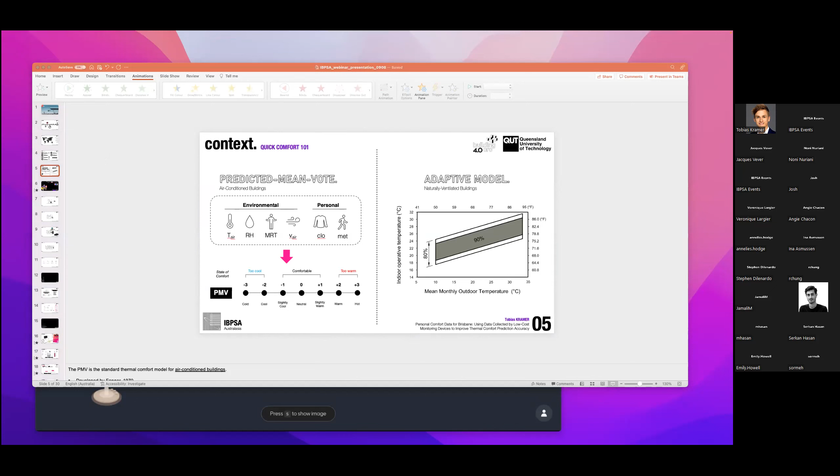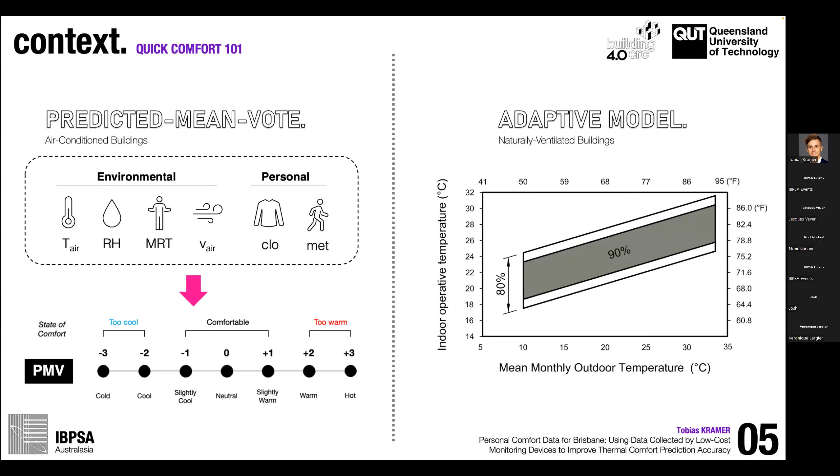Sorry, Toby, sorry to interrupt. I'm just making sure that you are going through your slides, because I can only see the first slide. I think we all can just see the first slide. Okay, that's weird. Let me just do it again. I think it's sharing the wrong screen. Let me just do it again. Yeah, no worries. This one. Sorry about that. Okay, do you see the slide now? Yes. Okay. So I'll just go back then.

So about myself, I think I mentioned everything. So visualization, then the team behind me. So now you can actually see the people that are in the team. So as I said, great people behind me.

And now just a short repetition. So we have the predicted mean vote on the left side and the adaptive model on the right-hand side. And continuing with my explanation about the adaptive model, that's actually a pretty straightforward way, because we only have two input variables, the indoor operative temperature and the mean monthly outdoor temperature, or running mean. And then we relate these two variables to each other. And usually the goal is to get in that comfort band to create indoor climate conditions which are comfortable. So these are the two conventional models.

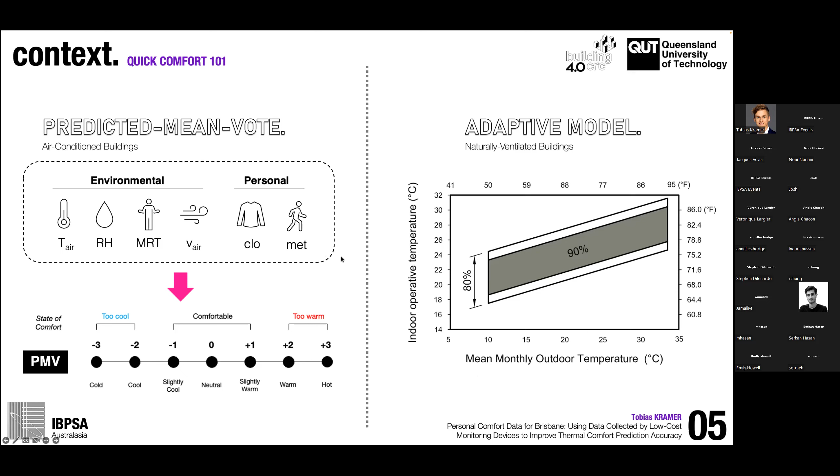And in today's presentation, I will mainly talk about the predicted mean vote model, because the data that we collected is from air-conditioned buildings. But as I said, before I start with the actual presentation, I think that first of all you guys should have your say. So I created a short question on Menti. So you can just scan the QR code here, or just go to menti.com and use this code to access the question. And then feel free to answer the question in whatever way you like, and then we can briefly address your answers before I go on.

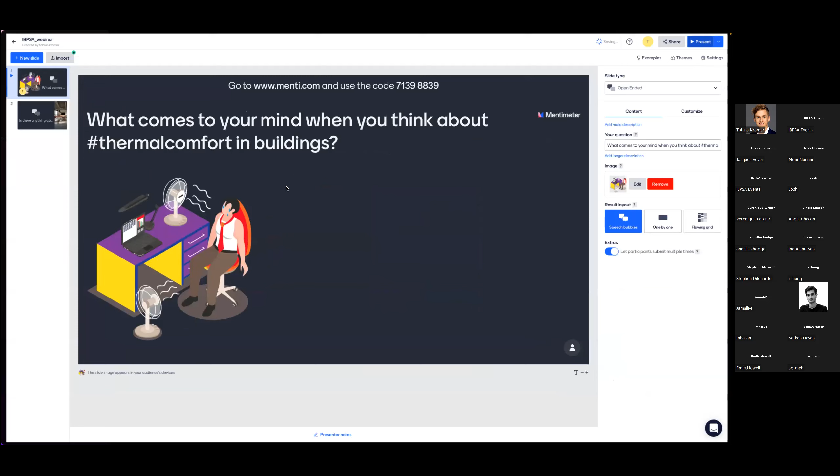So let me just make sure that you guys see the answers. All right. I think if you keep the code and the QR as well next to it, it'll be good. So people can, okay, great. Menti code.

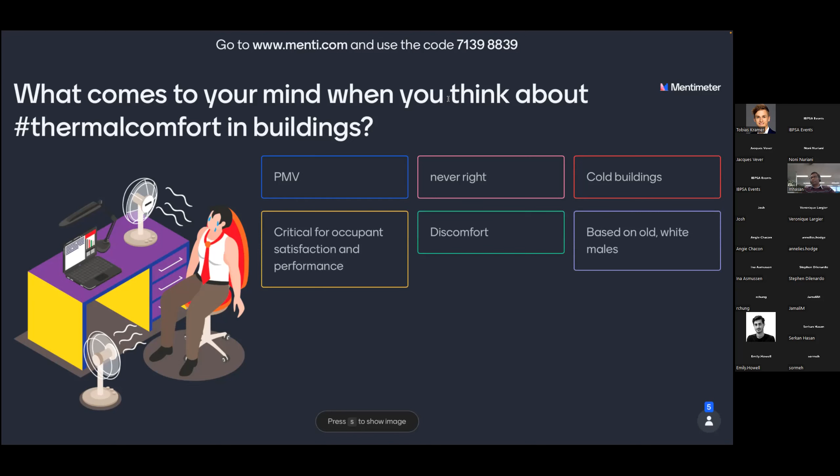Yes, that's interesting. That's basically what I expected. So never right, cold buildings. These are the answers that we get from most consultants. Also, comfort definitely critical for occupant satisfaction. Unfortunately, when we talk about thermal comfort, it's often discomfort that people experience. Chills from sitting under a diffuser. These are the answers that we get most of the time. So this is actually a very good picture of the general situation. Ideal temperature and humidity is actually what we want, but unfortunately we don't get it most of the time.

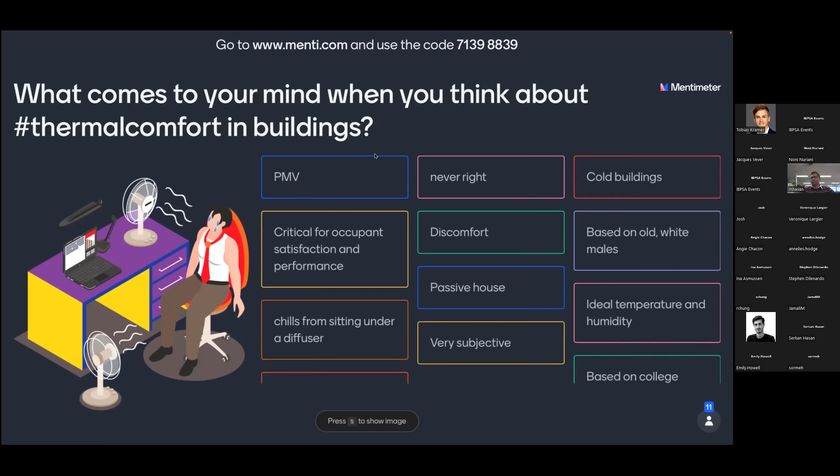So maybe we just leave it here, and I will continue with the presentation, and we can come back to these answers later. Also make sure that you don't go to the next question just yet, because the next question is supposed to be answered after you've heard all the information that I'm sharing. All right, let me go back to the actual presentation now. So just to make sure, do you guys see my presentation now? I hope so. Yes. Okay, perfect.

So let me just start with the actual presentation and a short introduction. I'm an engineer, so I like numbers. So I thought, why not start with some basic numbers? And the first number that I want to talk about is 3 times. What this number represents is that the cooling demand is expected to triple by 2050. That's the consequence of climate change, because we have warmer outdoor conditions, but also a consequence of the increasing building stock all around the world. But what it definitely says is there's a significant challenge.

And in that context, there's something that we call a vicious cycle, because climate change itself and the more extreme conditions put a lot more pressure onto buildings, which then have to use more energy to keep the indoor climate comfortable. But this again, because we have to use more energy, is actually exacerbating climate change because of the greenhouse gas emissions. So this is why we call it a vicious cycle. But what I think, and what other researchers agree, is in the middle of this vicious cycle actually is thermal comfort, because thermal comfort is the main reason why we actually design buildings.

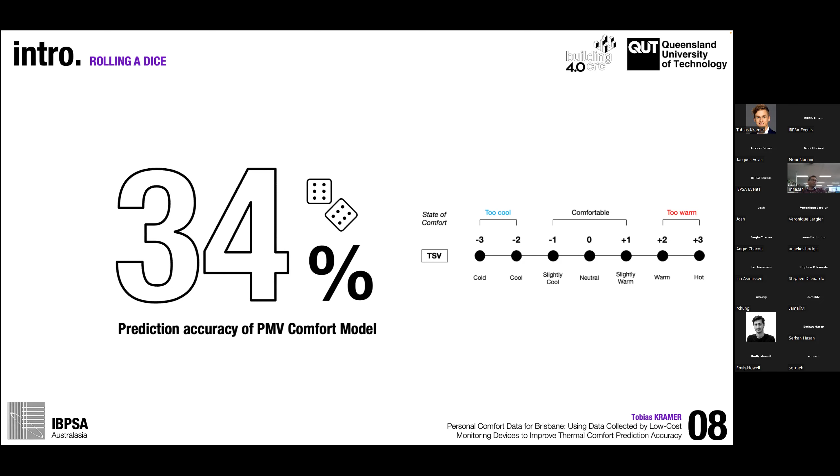Then the next number, 50 or 50 years, and this might or might not be connected to the previous number. That's the time since the introduction of the PMV model. So the PMV model was introduced at the beginning of the 1970s. So that has been 50 years now. And if you just think about what happened in terms of technological advancements throughout the years.

So shortly after the introduction of the PMV model, we got access to personal computers. A couple of years later, around the millennium, all of us got access to the internet and things like Google. We are now using smart mobile phones on a daily basis. And since a couple of years, we are also starting to use self-driving cars. So there have been a lot of technological advancements, especially in the last 20 years. But in terms of comfort and comfort research, we are still using models that are 50 years old.

I don't want to say that the PMV model is a bad model, because in the end it put thermal comfort into focus, and it was the first time that we actually started to think about thermal comfort at all. But on the other hand, we just have to acknowledge that the model was developed a long time ago, and by that time, the model was limited to the technological progress back then. But over the last 50 years, so many things have happened, and this should give us a lot of potential to upgrade the models that we are using at the moment.

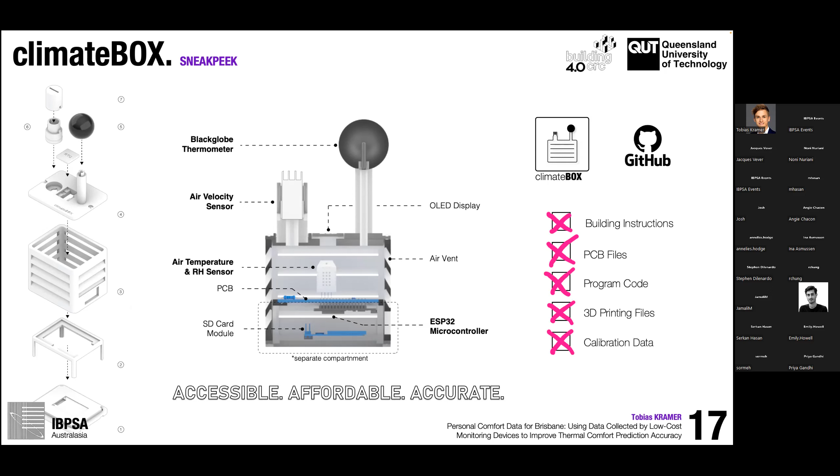And now I want to talk about the results in more detail. I'll try to keep it informal, and I won't go into too much detail, and I try to keep it light. So first of all, what we looked into was how did the participants engage, and how was the experience for them? Because as I said, one of the main goals was to make it as user convenient as possible.

And what we found is that we actually achieved that goal, because the response time per questionnaire was relatively low. It was only 45 seconds as the mean value, which is under our goal of 2 minutes. And what we also found is that we could prevent user fatigue, and most of the participants submitted around 10 questionnaires or samples per week, which is a great number.

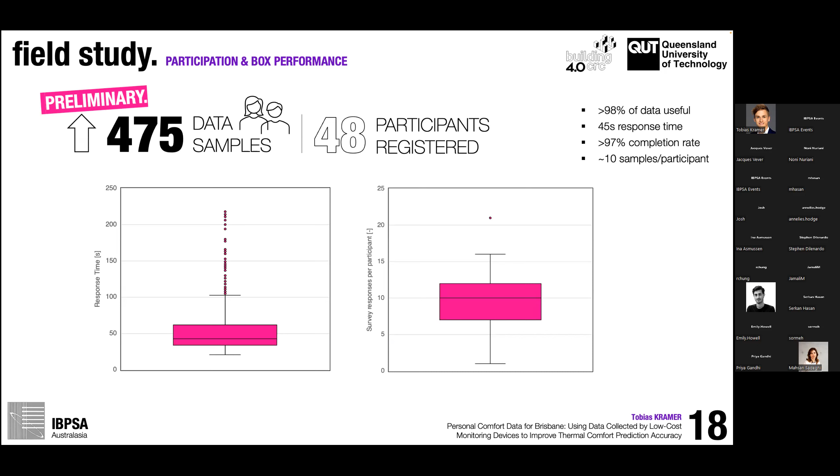And back at that time, so it's preliminary, as I said, we had 475 data samples, gathered from 48 participants. And I will talk about the final numbers later. But before I actually talk about the results, what I want you guys to keep in mind is that at that stage of the research, we had some kind of an uneven distribution. So if you look into the age group and also the gender distribution, it's kind of imbalanced. So when I talk about the results, please try to keep that in mind when you make your own interpretation.

All right, results. First of all, let's just start with the descriptive results about thermal comfort in general. So usually the main thing that you're asking is, how do you feel right now? So the questionnaire followed the right here, right now approach.

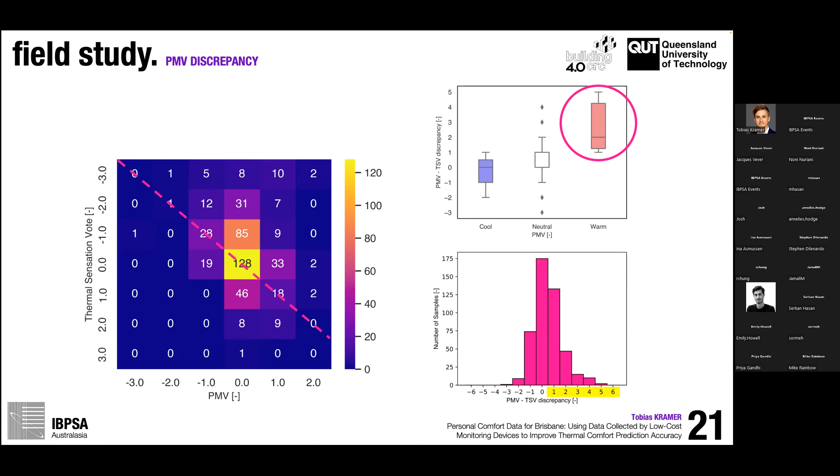And what we also can say, just by looking into the fields above the main diagonal in the upper right corner, and also in the histogram in the bottom right corner here, is that we have many more votes on the right hand side, which means that the PMV-TSV discrepancy is positive, and that basically means that the PMV overestimates. So to make it a little bit easier, at, for example, a temperature of 23 degrees, the PMV model might say comfortable, whereas the actual thermal sensation of people in that building is much lower than the prediction of the PMV model. So this is why we say the PMV model overestimates comfort.

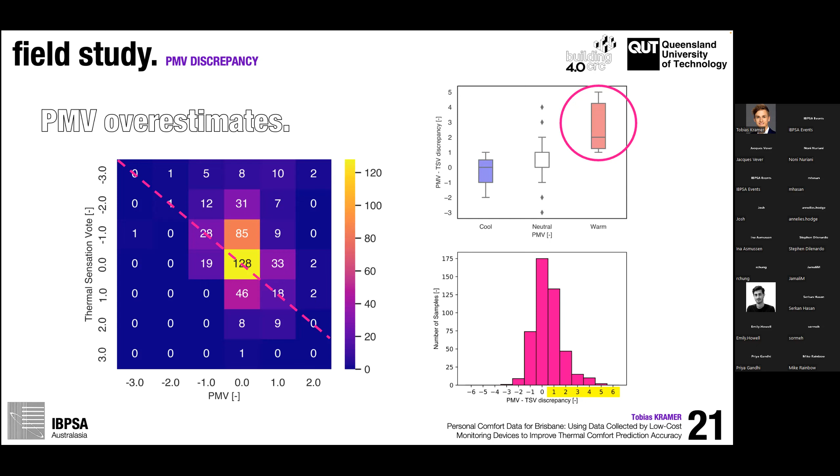But this is only the PMV comparison. The next step that you can do in the analysis is to use also contextual factors. So in this study, a pretty important contextual factor was the location. Our field study took place in Brisbane, and what we did is that we compared the collected data to already existing data sets for other locations in Australia. And in order to make it easier to compare the locations and the different data sets, we limited the data sets to air-conditioned office buildings only, because this is the type of building that we collected data in, and also narrowed everything down to a temperature range of 23 to 24 degrees.

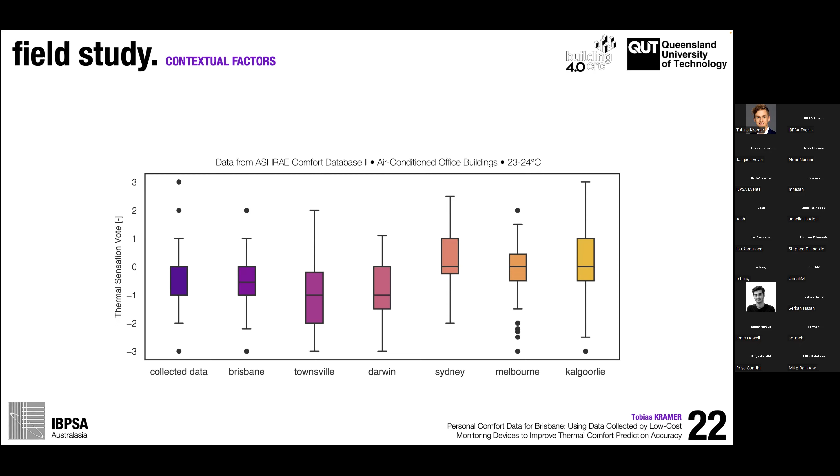And what these box plots show here, if you look at the different locations, is that this temperature range is perceived differently in all the cities that we looked into. And even more interesting, at least we think that it's interesting, is that they seem to be in order of the climate. So what I mean with that is that these temperatures, 23 to 24 in Brisbane, are perceived mainly as slightly cool, whereas in warmer climates like Townsville and Darwin, they are already perceived sometimes as cold or cool, so cooler than in Brisbane. On the other hand, in climates which are a bit colder than Brisbane, at least for some parts of the year, in Sydney, Melbourne, and Kalgoorlie, this temperature range is mostly perceived as neutral. So it's perfectly comfortable.

What this shows is an indication that there's an influence of the location and outdoor climate on thermal comfort in air-conditioned buildings. And that's something that the PMV model doesn't incorporate just yet. So the question here is, with all the data that we have all around the world, do we need custom comfort models? So do we need comfort models for specific regions, for specific locations around the globe, just to make the prediction more accurate and to not continue to waste this energy for cooling or making our buildings too cool?

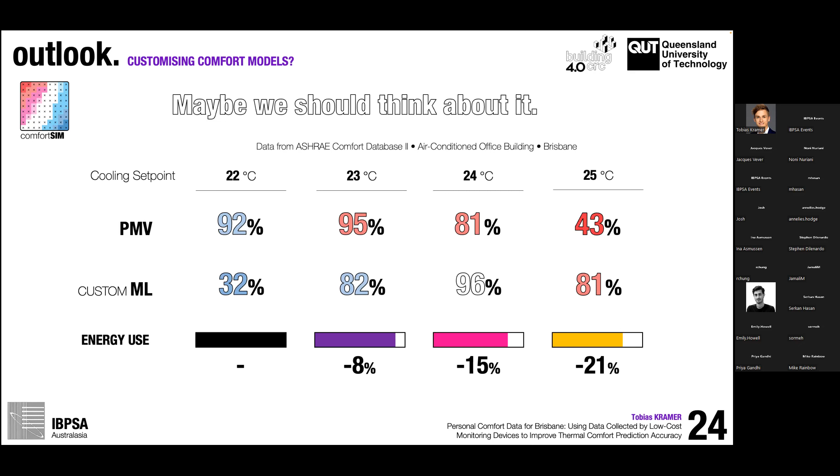And in the end, data is key. So if we are able to collect more data, then we will also be able to increase the prediction accuracy of our models. So I just want to conclude with 5 points, and these might be your main takeaways from today's session. So first of all, I want to highlight the potential of low-cost monitoring devices. So the device that we have built was around $75. So that's much less than the actual cost that the common standards require.